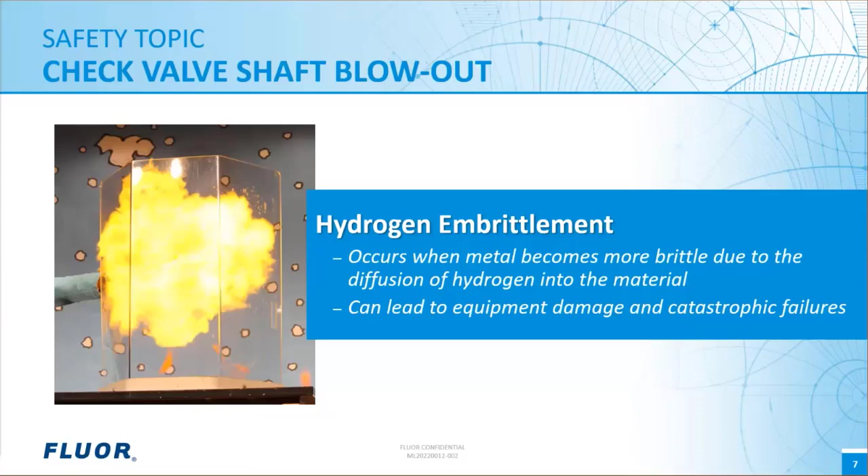Thank you, Brent. Our safety topic today, as it relates to our webinar, is on hydrogen embrittlement and an incident that occurred when a check valve shaft blew out. Hydrogen embrittlement is an important condition to consider when looking at hydrogen systems. It refers to the condition when metal becomes more brittle due to the diffusion of hydrogen into the material. And when materials become more brittle, there's a higher chance of cracking and leakage, and this can lead to equipment damage. As we know, hydrogen is highly combustible, so if leakages occur, explosions can occur and the failures can be catastrophic. And this is exactly what happened in 1997.

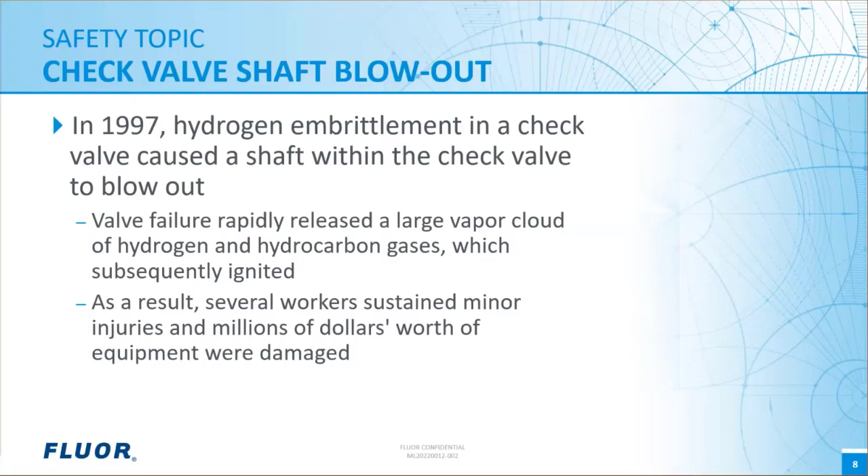There was an incident of hydrogen embrittlement in a check valve that caused the shaft within the valve to blow out. The valve failure released a large vapor cloud of hydrogen and hydrocarbon gases, which subsequently ignited. This resulted in several workers sustaining minor injuries, unfortunately, and millions of dollars worth of equipment were damaged. If we take a look at a cross-sectional view of this check valve, you can see in this red circle here, that was the location of failure, specifically in the dowel pins. The dowel pins are made out of hardened steel, which is more prone to embrittlement. They're also used to retain the shaft within the check valve. So when the pins failed, the shaft blew out. And this is what caused the leakage and explosion.

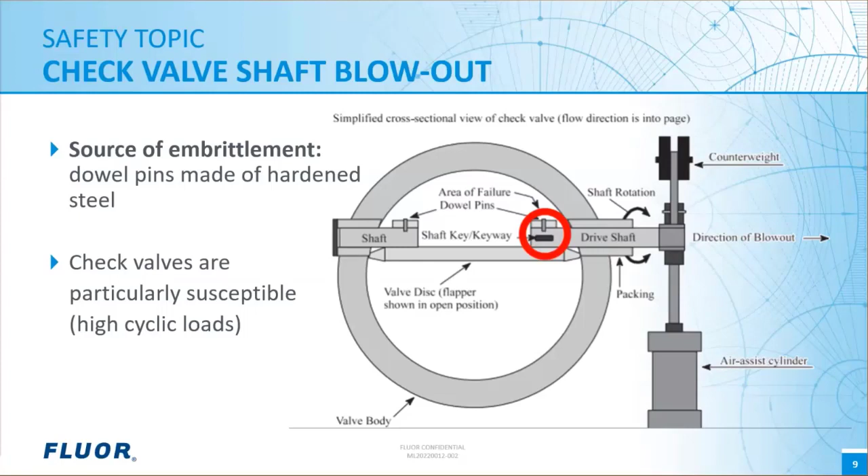It's also worthwhile to note that check valves and butterfly valves are particularly susceptible to this condition because of their geometry and because they typically undergo higher cyclic loads from having to open and close more frequently. So from this incident, there were a few lessons learned. For one, it's important to inspect hydrogen facilities to determine if there are valves that are at risk of hydrogen embrittlement. And if so, consider replacing or modifying the valves using a blowout-resistant design. If the valves are being modified, it's also important to consult the valve manufacturer to ensure that any potential modifications are safe. This incident was obtained from a document issued by the U.S. Department of Energy, and if you would like more information, the website is shown here.

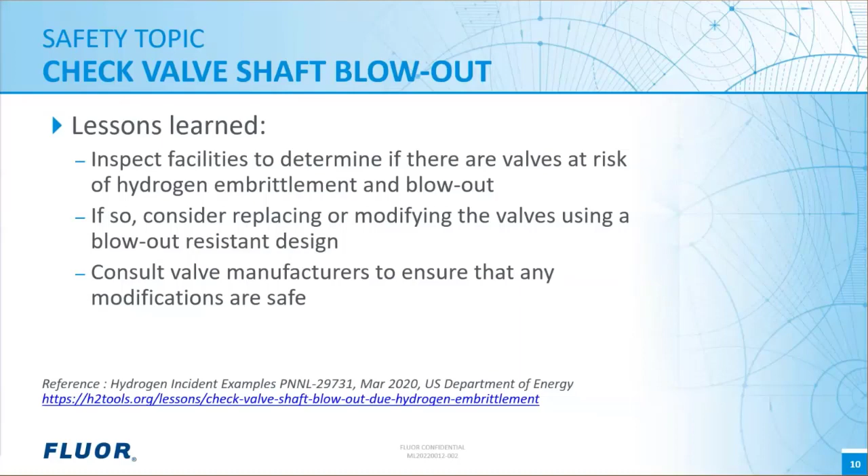Morning. We are going to talk about the various energy sources in the world, the potentials and challenges of using hydrogen as a clean energy carrier, and the design of infrastructure required in massive hydrogen storage and pipeline transportation.

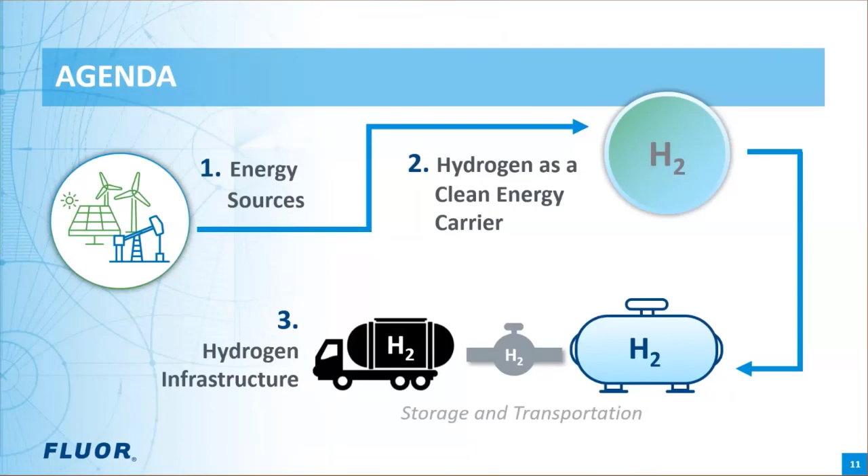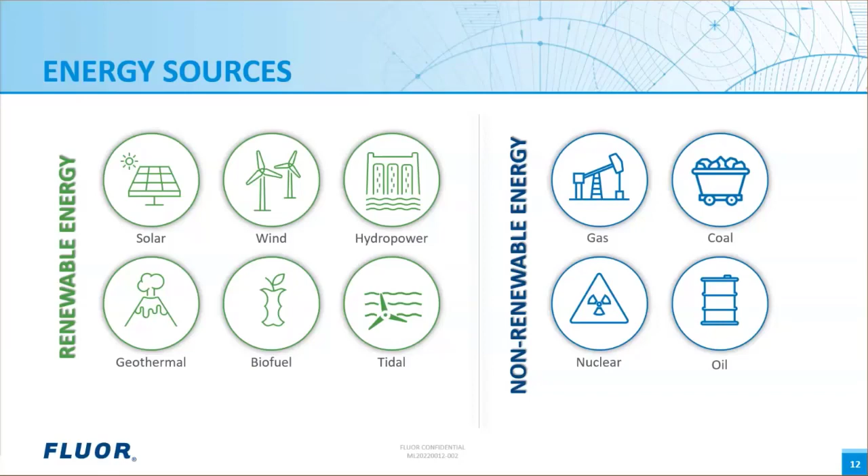On this slide, I wanted to show you the energy sources currently available to us in the world. We basically are using renewable and non-renewable energies. We are very familiar with non-renewables such as natural gas, oil, coal, and nuclear. We also have renewables such as biofuel, solar, wind, hydropower, geothermal, and tidal energy. Pretty much these are all the renewable energies that we know so far.

Two of the biggest challenges we are facing globally today are climate change and the continuous increase of energy demand. Based on the U.S. Energy Information Administration data, the U.S. consumed a total of 93 quadrillion BTU of energy in 2020, which is 7% lower than that of 2019 due to the impact of the COVID-19 pandemic.

However, the projection of U.S. and world energy consumption continues to grow dramatically in the foreseeable future. On the other hand, among all the total energy consumed in the US in 2020, about 79% was still from fossil fuel, and 34% was from natural gas. The consumption of fossil fuels was the major source of carbon emission and global warming.

Emissions must peak by 2025 to prevent disastrous climate change effects, according to the new UN climate report. The increasing energy demand and global warming control are now in conflict. It is therefore necessary to phase down the use of fossil fuel and increase the percentage of renewable energy consumption. Given this global consensus, also agreed by the US, we must think about how to make the best use of the existing massive fossil fuel system to transition to a clean energy system.

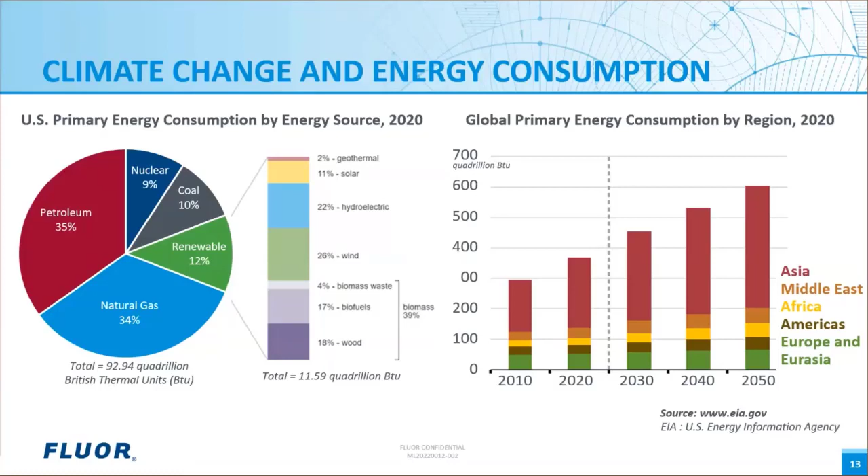The increasing energy demand cannot be met through increasing renewable energy production without resolving its major limitations. The major obstacle of using renewable energy is not only its high cost, but also the misalignment between its production and the consumer needs. Hydrogen for a long time has been looked at as a clean energy carrier that can help improve the alignment between renewable energy production and energy needs.

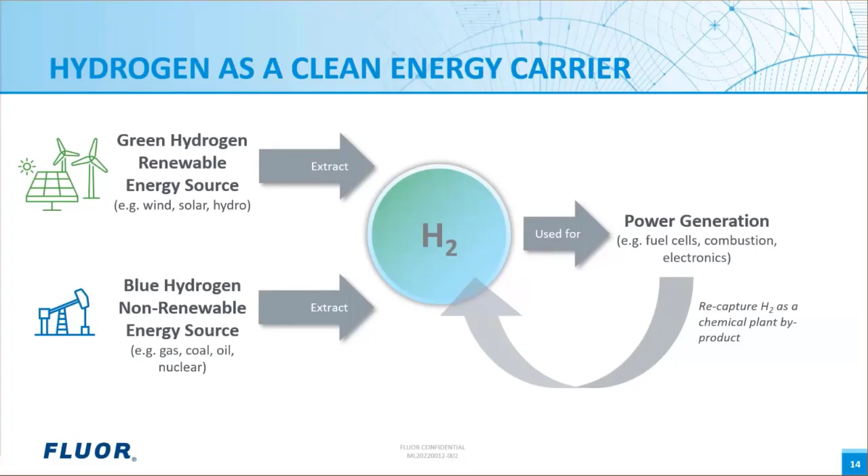Hydrogen can be produced from renewable energy as green hydrogen, and from non-renewable sources with carbon capture and sequestration as blue hydrogen. Hydrogen is also the byproduct of many chemical plants. The production, gathering, storage, and transportation of hydrogen will be an important part of the clean energy system to help control global warming. Need to emphasize that CO2 capture and sequestration...

It's possible to continue to make the best use of fossil fuels and infrastructure to make it clean by removing the CO2 content. Carbon capture and sequestration is part of the blue hydrogen production using non-renewable energy sources. That procedure is related to the hydrogen economy too.

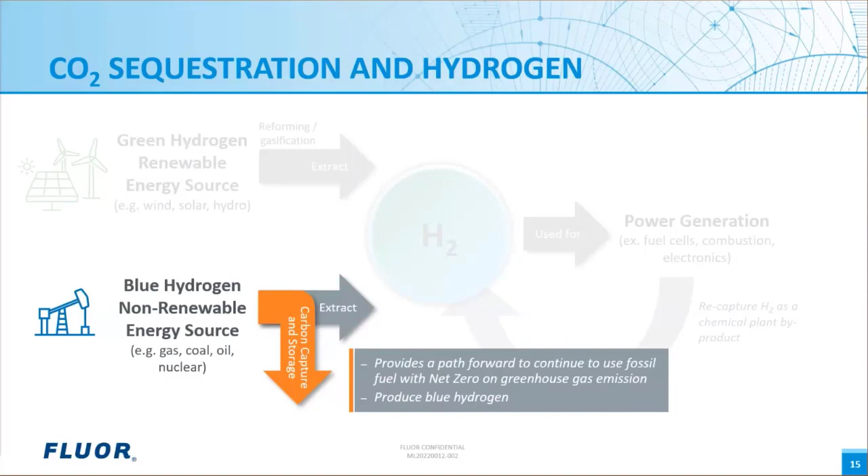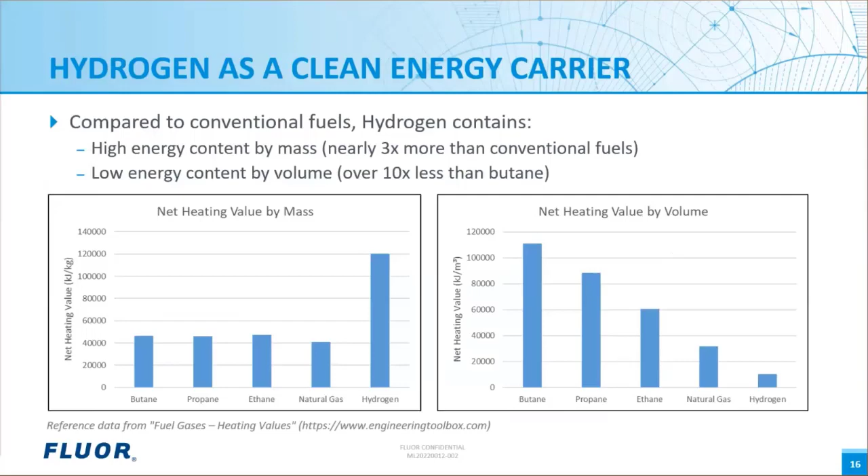Fuel cell power generation using hydrogen is very clean. It only produces water. However, the combustion of hydrogen in air as a fuel can lead to thermal formation of nitrogen oxides, another greenhouse gas. When released directly, hydrogen itself can interact with other gases and vapors in air to produce powerful warming effects. A new UK government study determined that hydrogen's global warming potential is about twice as bad as previously understood.

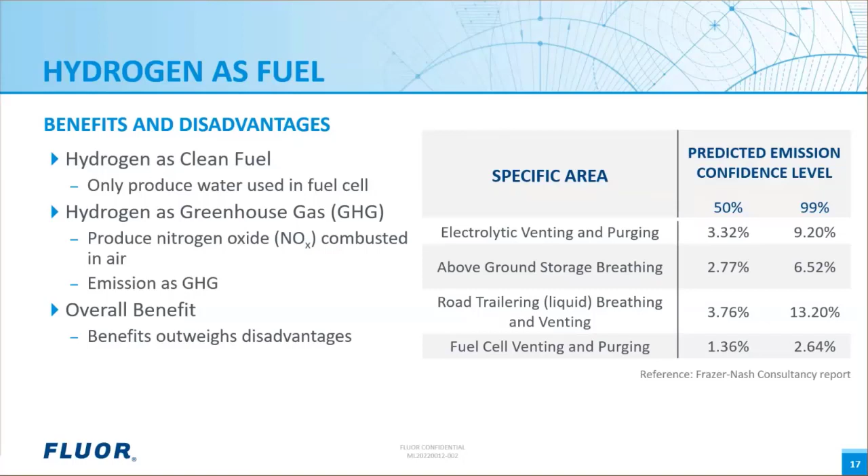The table on the right shows the estimated hydrogen emission. However, thanks to the very high energy mass content of hydrogen, even assuming the worst leakage scenario, it is still an enormous improvement in global warming by using hydrogen. The benefits outweigh the disadvantages in using hydrogen. The researchers did clearly demonstrate the importance of controlling hydrogen leakage within a hydrogen economy.

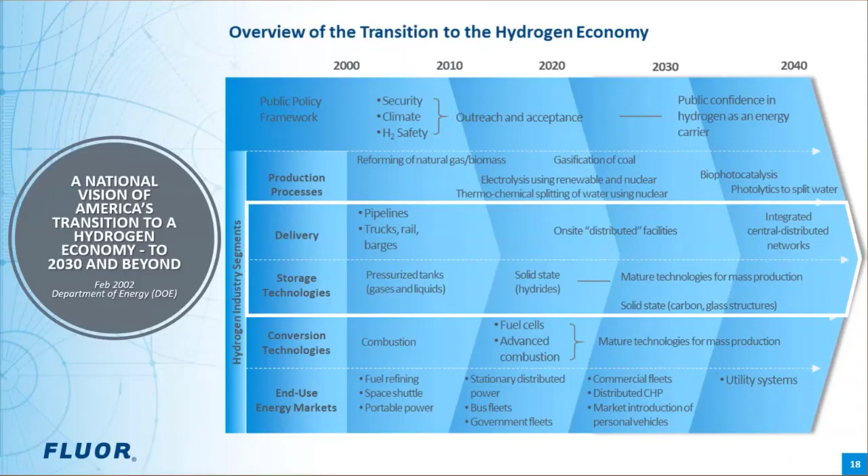Because of the promising benefits, the U.S. Department of Energy produced a national vision of America's transition to a hydrogen economy. This chart shows a roadmap. Our focus today is about the storage and delivery of hydrogen. As you can see in the middle, the roadmap related to the storage and transportation of hydrogen in the future is an integrated central distributed network targeted for the year 2040.

The hydrogen will be collected through the gathering system into hubs. From there, hydrogen will be compressed as gas and transported in major trunk lines, interstate or intrastate pipelines, and stored in massive storage facilities. Hydrogen will be delivered to end users from storage facilities through distribution pipeline networks.

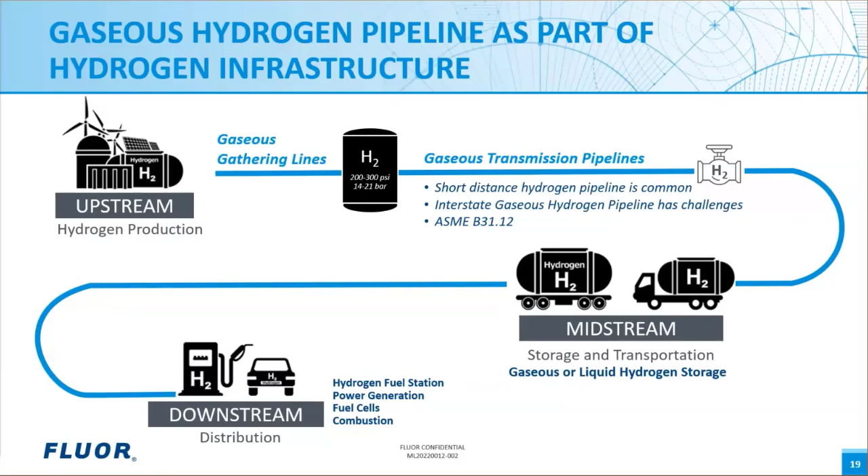In recent years, there's also motivation to use ammonia as a carrier and chemical storage media for hydrogen. Ammonia is liquid in normal conditions. The molecule is bigger with much lower leakage potential in metal pipes. It has lower volume and higher mass of hydrogen contents if transported in pipeline. However, there are higher nitrogen oxide emission risks associated with the production and application of ammonia comparing to pure hydrogen.

Ammonia is ideally suited to be made from green sources and can be efficiently shipped in massive volume globally through the marine system. Once imported, ammonia can be decomposed back to hydrogen into the onshore integrated hydrogen network.

However, ammonia is highly corrosive, requiring it to be contained and shipped in very dry conditions. Ammonia is not an ideal medium for long-distance pipeline transport. The maintenance cost is very high compared to other pipelines. Magellan Midstream decommissioned its 1,100-mile Texas to Upper Midwest ammonia pipeline in 2019 due to its unforeseeable high operation and maintenance cost. Today's discussion focuses on the onshore pipeline transport systems, and anhydrous ammonia pipeline will not be our focus,

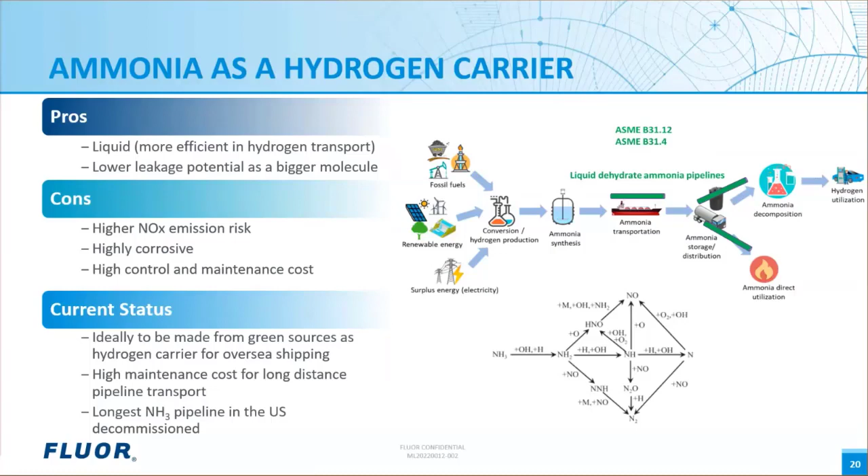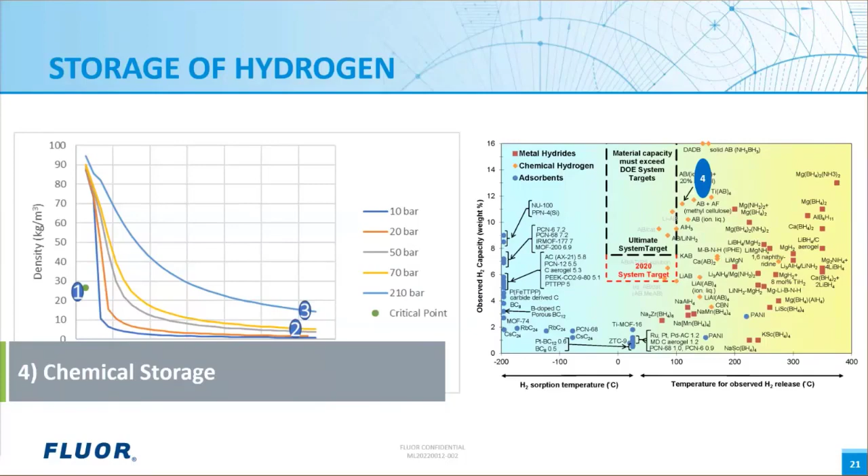To build an integrated central distribution network at the national level, the utilization of pipelines and underground storage facilities are necessary. Pipeline enables massive transportation of hydrogen as gas or supercritical flow. Pipeline is safe and very economical. Cost of pipeline transportation can be reduced through optimization in design and operation.

We will demonstrate the J-curve analysis in later slides to demonstrate the minimization of total cost per throughput of transport in pipeline design. The minimization of the transportation cost helps to lower the overall cost of using hydrogen as a clean fuel.

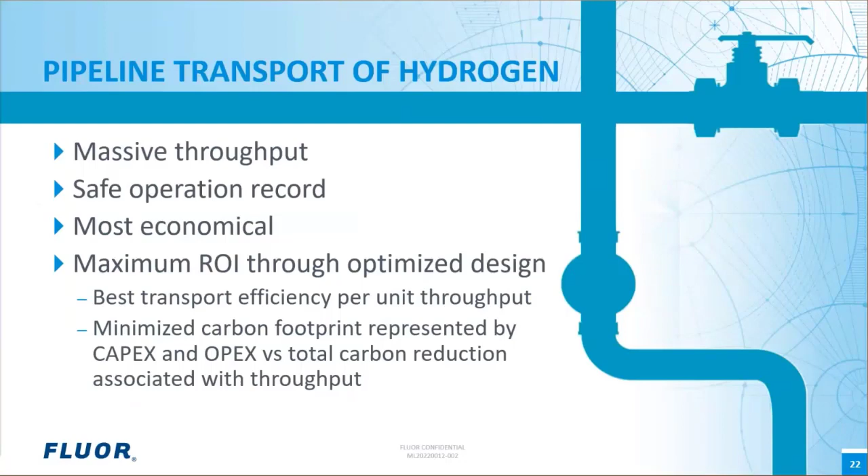Based on the framework of the integrated central distributed hydrogen network, we listed the conditions for hydrogen transport and storage most likely in the future. The transmission pipeline will operate at around 55 to 85 bars, which is ASME 600-pound class system.

Geological storage will be at 100 to 670 bar, which is above ASME 2500-pound class rating, for components near the bottom of the underground storage. The surface area will be lower class rating.

We will also need large flow rate centrifugal compressors capable of producing 85 bar discharge pressure for transmission pipelines, and reciprocating compressors capable of producing 330 bar discharge pressure for underground storage injection. The terminals and distribution networks of hydrogen will be at 52 to 83 bars. It's also ASME 600-pound rating.

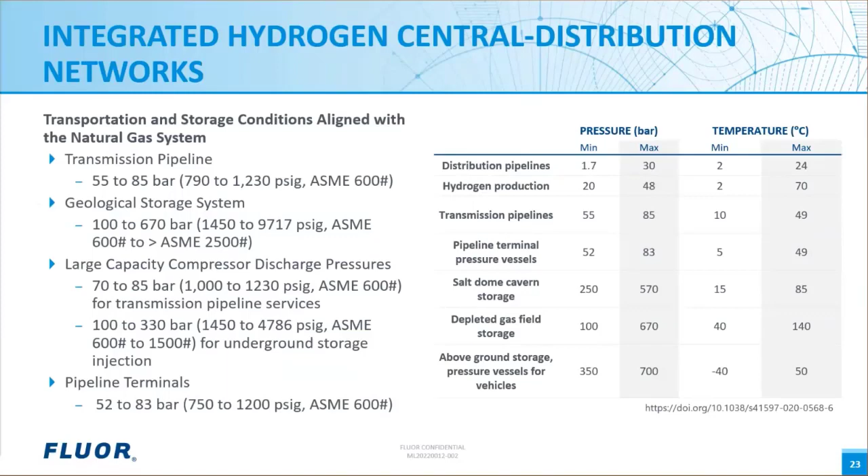Geological storage provides a massive capacity for the future. Those storages include underground salt dome caverns, depleted gas reservoirs, aquifers, and hard rock caverns. The later slides will show the latest reported data about the existing underground gas storage facilities in the U.S.

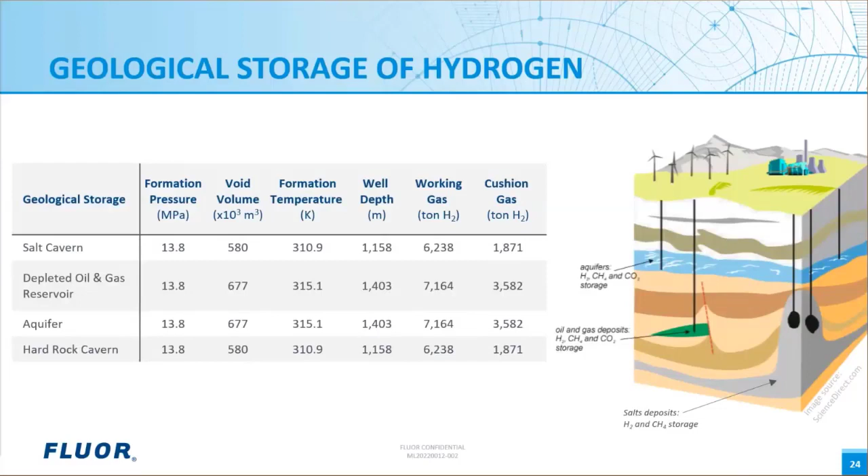The U.S. currently has a total of 453 underground gas storage sites. Salt dome caverns are a promising hydrogen storage solution. They can provide a huge capacity in the 100 gigawatt-hour range.

Generally, rock salt has a very low hydrogen permeability, which ensures minimal loss of hydrogen or contamination with the geological surroundings. Potentially, salt dome caverns can store hydrogen at pressure more than 100 bar, with fast storing and releasing rates. Examples of existing hydrogen salt dome cavern storage are shown here in the table.

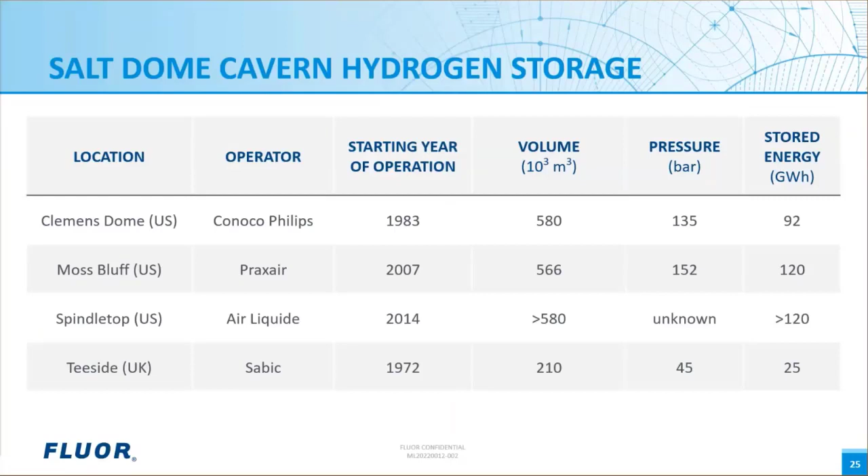There are currently three types of concepts on long-distance transmission pipelines for hydrogen. The first one is blending of hydrogen in existing natural gas pipeline network. Second is construction of pipelines for pure gas hydrogen. The third one is liquid ammonia pipeline. We mentioned the high maintenance cost of ammonia pipelines, so the anhydrous ammonia pipeline is not discussed today.

Pipeline transmission of hydrogen is not something new. It dates to the late 1930s. It has a very good safety record. Normally, hydrogen pipelines operate under 69 bar G.

The U.S. currently has 2,538 kilometers of pure hydrogen transmission pipelines in operation. In Europe, it's about 1,770 kilometers. The current long-distance hydrogen pipelines in operation in the U.S. are mostly along the Gulf Coast. They transport hydrogen to well-established long-term chemical and manufacturing users.

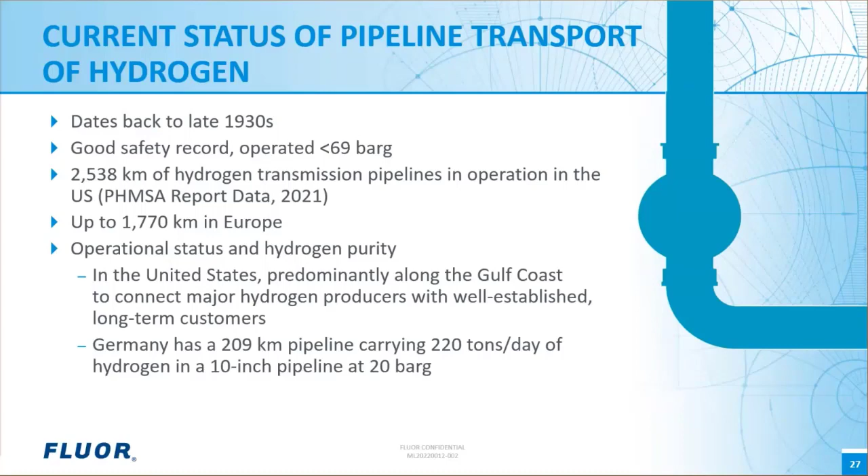Germany has about 209 kilometers of pipeline carrying 220 tons per day of hydrogen in a 10-inch pipeline with very low operating pressure of 20 bar.

The U.S. natural gas pipeline system has evolved from local networks serving municipalities in the mid-1800s to a vast network of interconnected pipeline systems with 3.9 million kilometers of pipe, more than 400 underground storage facilities, and more than 1,400 compressor stations. Natural gas accounted for 34% of U.S. energy consumption in the year 2020.

Moreover, recent increase in U.S. gas production rates suggests that the existing natural gas system will continue to provide relatively clean energy for some time, especially with increased adoption of energy efficiency measures. Given these characteristics, hydrogen blending could become a widespread, long-term, and integral practice to supplement critical U.S. energy infrastructure.

Actually, the U.S. Department of Energy has been working on this for years through the HyBlend project. INGAA, the Interstate Natural Gas Association of America, also released their RFP for developing a guideline on blending hydrogen in existing natural gas systems.

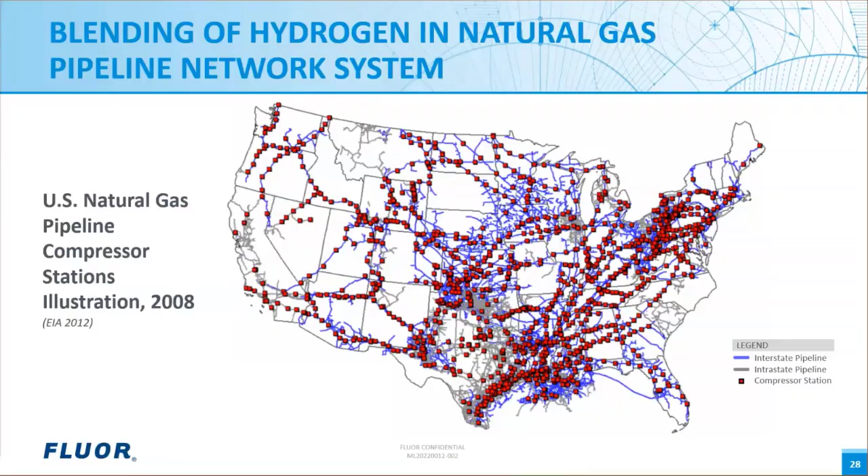Europe could devote, based on the news, 40,000 kilometers of natural gas pipelines to hydrogen by 2040. The blending of hydrogen in existing natural gas systems provides an economic opportunity in gradually transitioning to the hydrogen economy. With modification and changes, the existing gas system can also be upgraded to handle pure hydrogen.

The upgrade of the existing system can be the most cost-effective way with minimum waste and environmental impact compared to new construction of pipelines and storage for pure hydrogen. It has been proven by pilot studies that the system requires little or no change for hydrogen concentration less than or equal to 20%. The cons are it requires downstream hydrogen extraction and recovery at regulation stations for hydrogen end users. Economic trade-off evaluations are necessary to obtain a cost benefit.

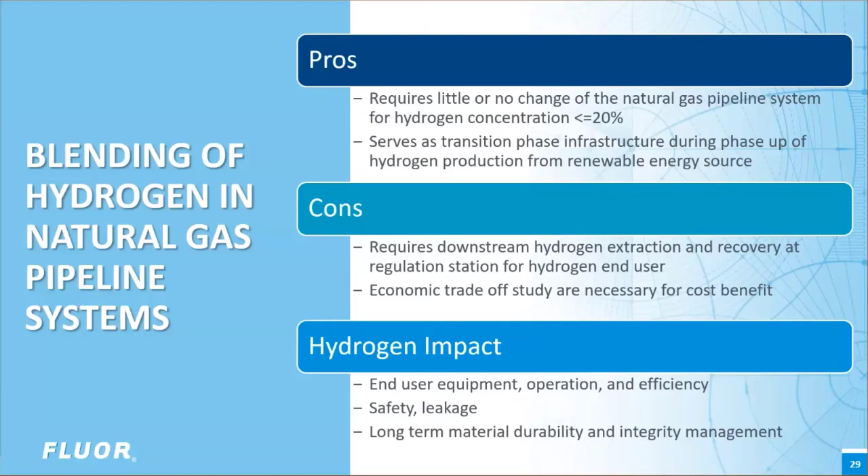Blending of hydrogen in the system also has impact on end user equipment and operation efficiency. Whether the safety and high leakage potential of hydrogen have major impacts on end users also needs to be understood. Long-term durability and integrity management need to be studied and procedures need to be developed. Existing natural gas systems need to be upgraded to be able to transport pure hydrogen or blend with hydrogen higher than 20%. There are technical challenges to that.

However, the natural gas energy content is associated with CO2. The expense of hydrogen blending in natural gas pipelines will also include carbon capture and sequestration and hydrogen recovery. In general, a pure hydrogen system will be not only clean, but also economical.

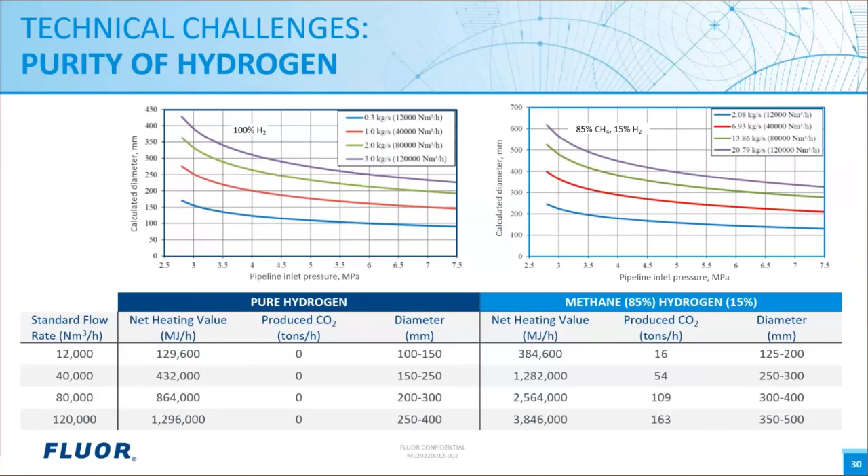The next major challenge is material selection. There are steel pipes and non-metallic pipes available for hydrogen application. The Pipeline and Hazardous Materials Safety Administration data shows that up to 2021, the U.S. has a total of 2,538 kilometers of hydrogen transmission pipelines, compared to a total of 485,000 kilometers of all gas transmission pipelines.

The data shows that the transmission hydrogen pipelines in operation are predominantly carbon steel pipes. All steel pipes in hydrogen transmission are not coated. Environmental hydrogen embrittlement is an issue in hydrogen services. Metal working in a hydrogen environment over a long time will cause deterioration of the material.

There is, however, no hydrogen embrittlement at low pressure less than 70 bar. This is good news. Hydrogen transmission pipelines are generally operated at pressure from 20 to 70 bars. The expected service life can reach 15 to 30 years.

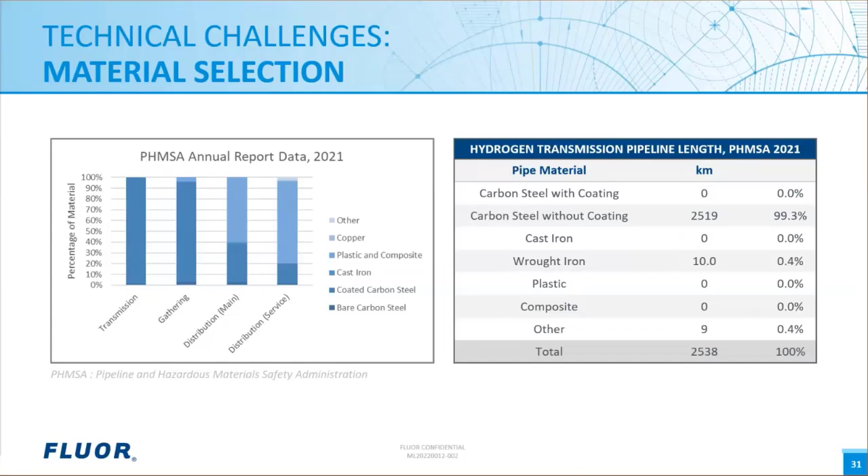Use of non-metallic material was never recorded in the gathering, transmission, and distribution of hydrogen in operation according to the PHMSA annual data. Some researchers show that reinforced thermoplastic pipes are ready to be used for hydrogen up to 42 bar, and HDPE pipes are hydrogen ready up to 15 bar. However, the design pressure of plastic pipes needs to be increased to at least 70 bar for hydrogen transmission, and long-distance testing is quite necessary.

The material required for underground geological storage is much more a challenge. Underground storage operates in a higher pressure range, which can cause hydrogen embrittlement. There is still research ongoing. We need to gather all the information and hopefully develop a guideline for material selection in this area.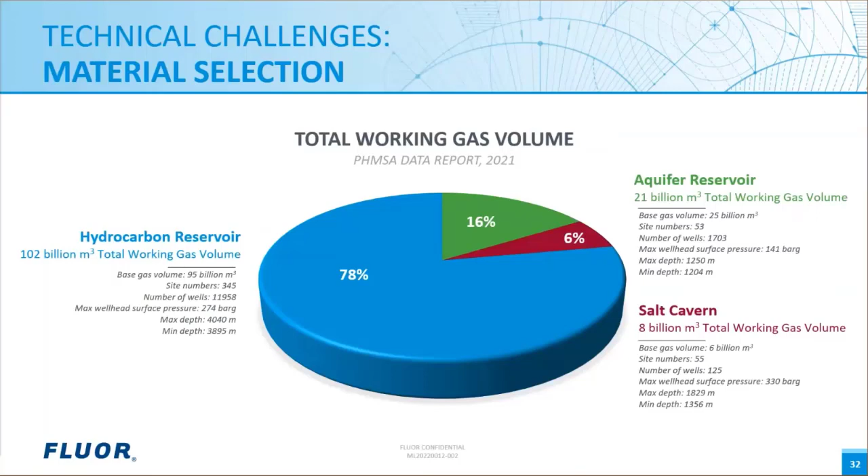The injection and withdrawal of pure hydrogen or gas with hydrogen blending dramatically influence the thermodynamics, mixture composition, and the contamination and containment in the storage inventory. The salt dome cavern thermodynamics need to be studied to examine the potential change of temperature, pressure, and thermal stability in the cavern. Rock salt has a very low hydrogen permeability, which ensures minimal loss of hydrogen or contamination with the geological surroundings. Gas withdrawal from salt dome cavern requires dehydration in early operation years.

The dehydration requirement quickly decreases after a few years of operation. The gas from the cavern becomes dry. Generally, salt contamination from the cavern storage is very low. However, some researchers show concern when very high purity of hydrogen is required. In that case, gas or hydrogen withdrawal from salt dome caverns needs desalination and dehydration. The current surface dehydration and filtering equipment used for natural gas need to be evaluated on treating very pure hydrogen.

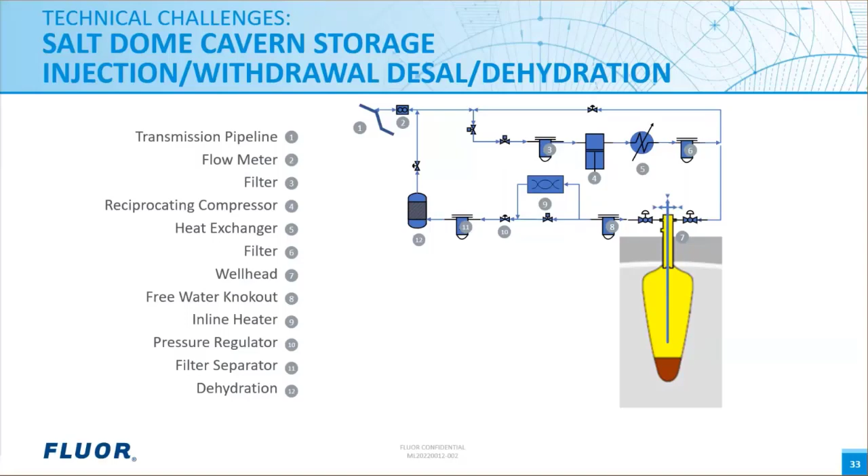Another major technical challenge is the compressor selection. We know that hydrogen volume is 3 times that of natural gas at the same pressure. Hydrogen is very difficult to compress. It has a very small molecule which has high potential for leakage through containment. The compression of hydrogen requires much more power, higher tightness, and special seals to reach the pressure required for high volume transmission. We know from compressor manufacturers that multi-stage reciprocating compressors are ready for producing discharge pressure up to 69 bar for hydrogen. This is considered the most state-of-the-art equipment for compressing hydrogen.

The maintenance cost of wearing parts creates a technical challenge in pure hydrogen service. A centrifugal compressor capable of providing large volumetric flow rates and discharge pressure more than 83 bar for transmission pipelines is yet to be developed. Another issue is the contamination of hydrogen through compression.

The DOE and INGAA are supporting the compressor design studies on hydrogen pipeline and underground cavern injection requirements. Hopefully, oil-free compressors that have a working pressure ranging up to 80 to 100 bar can be produced in the near future. Ideally, the compressor will be efficient, will not contaminate the hydrogen, and will be also reliable and durable.

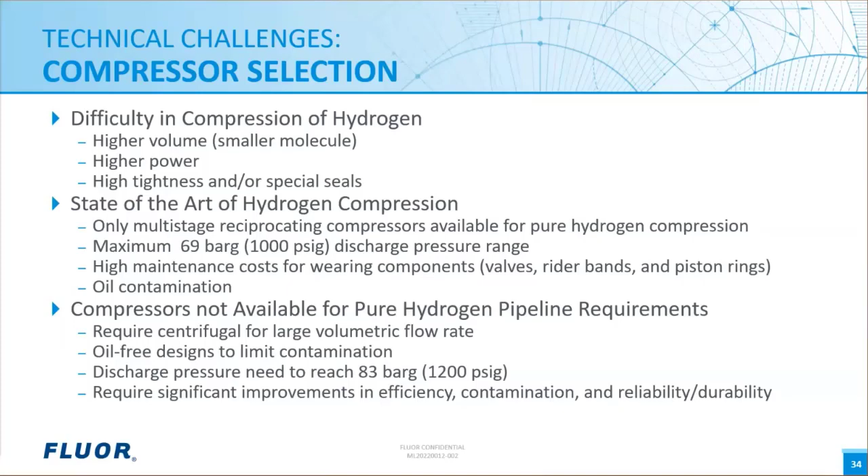There are other challenges, for example, in operation and integrity maintenance, and validated safety management measures for pure hydrogen pipeline. DOE, INGAA, and the PRCI are leading the development of industry standards in this area.

Based on the information we've just introduced, we can talk about the pipeline design and methodology for hydrogen. We think the most important thing is to have in-depth knowledge of both existing natural gas systems and hydrogen pipeline systems. The design will focus on material and equipment availability, cost, and safety. It also needs to consider uncertainty, including the purity of hydrogen in the system.

It's worth mentioning that artificial intelligence may provide a cost-effective way in hydrogen pipeline routing. For hydrogen pipelines, dispersion and rupture impacts will be different. This can be considered efficiently using artificial intelligence tools.

The design also needs to be based on solid construction data. Advanced tools in figuring out the cost basis on construction, based on construction experience, are quite necessary. The pipeline also needs to be economically optimized to be able to demonstrate the cost saving and carbon footprint reduction. It's necessary to compare the general cost of a pure hydrogen system versus a natural gas system with carbon capture and sequestration.

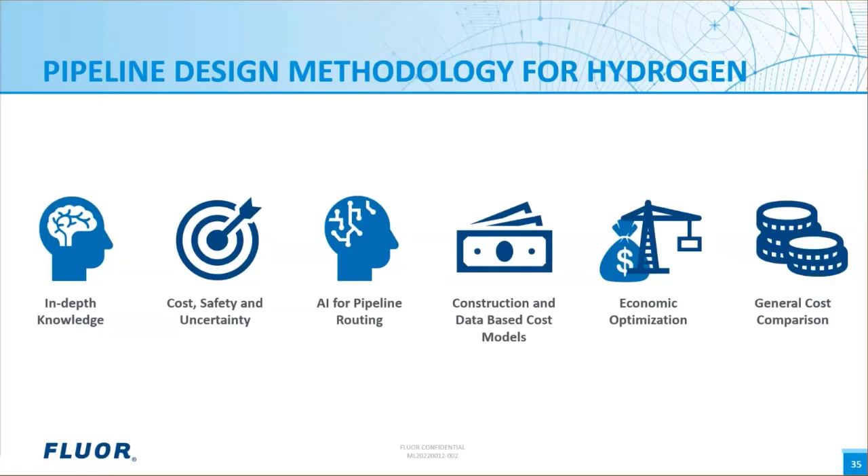Fluor's technical capabilities are very well suited in hydrogen pipeline and storage design. Our capabilities are guided by in-depth knowledge and history data. We understand the thermodynamics and flow assurance principles necessary for design, and have a strong history of understanding client's operational and capacity needs. Our philosophy enables us to provide flexibility with maximized return of investment and minimized transportation costs.

We have in-depth understanding and consideration of the safety of supercritical and gaseous hydrogen pipeline design. We mention supercritical flow particularly because although we call hydrogen pipeline a gas pipeline, based on the operating conditions of transmission systems, hydrogen is actually in most operating conditions a supercritical fluid.

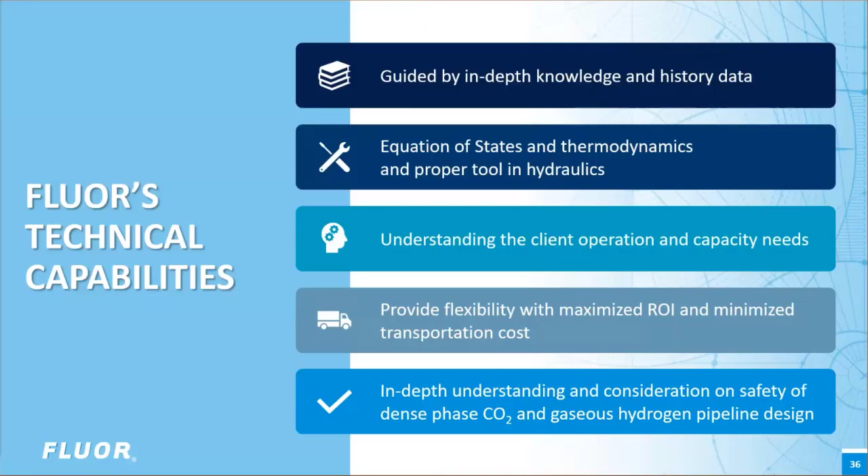This chart shows the typical pipeline system design optimization procedure we follow. We start with initial design based on history data, falling within the normal operating range of existing systems. We then work with the client to determine the required flow capacity, the stages of operation and construction, and the flexibility in the future for expansion or downsizing.

Different pipeline routes are then selected for economical and technical comparison. For each candidate route, there is a J-curve analysis for maximization of cost saving in pipeline design. Throughout the J-curve analysis, the optimized design is developed for every candidate pipeline route. The cost and savings for each route are then screened based on the J-curve analysis results. This procedure produces the minimum total transportation cost per throughput of the pipeline.

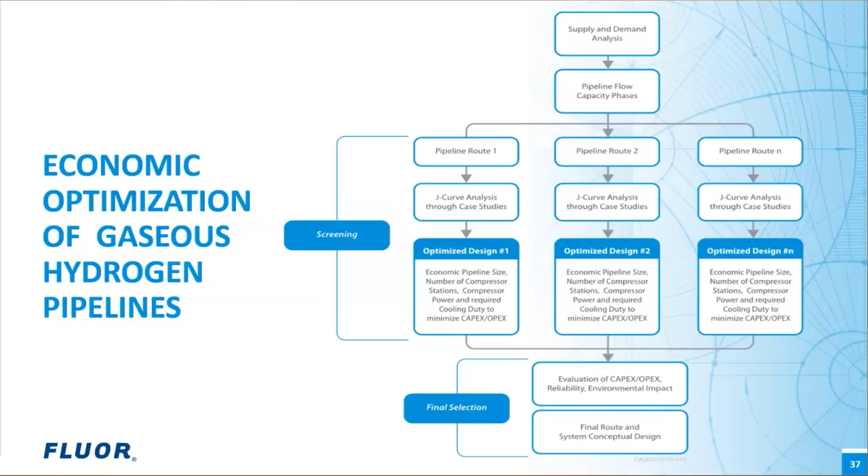The J-curve analysis is a widely used economical optimization method accepted in the gas industry. It considers the ballpark cost of the pipeline through scaling with capital expenditure, operation expenditure, and financial cost basis.

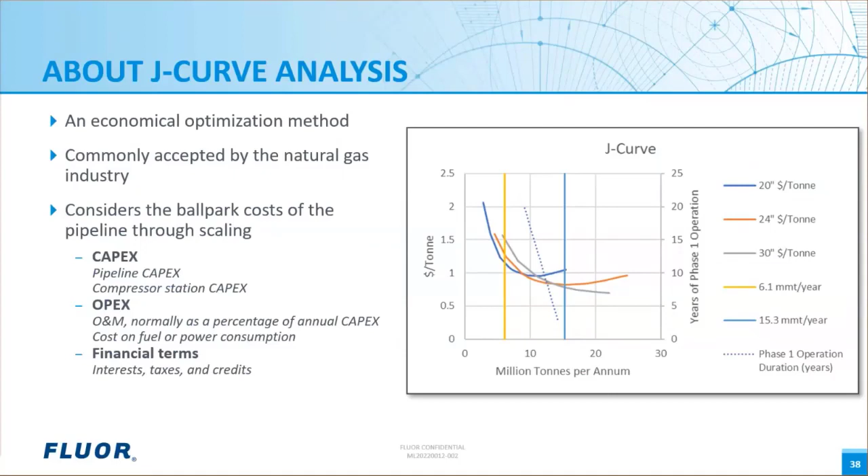The J-curve analysis starts with building a scalable basis for ballpark cost estimate. Based on the pipeline constructability analysis, a cost base for capex per unit size and length of pipeline, and unit power installed in compressor stations, are developed. The OPEX includes the cost basis for power or fuel and operation maintenance cost as a percentage to annualize the capital cost. The next step is to define the operating range, basically the throughput over the life cycle of the system.

Then a pool of candidate pipeline sizes, based on the history range of pipeline flow capacity, are defined. The hydraulics model is used to calculate the compression power, power loss, and pressure loss of the system, to provide data for the calculation of capex and OPEX of the pipeline. The transportation cost per unit throughput is calculated as the capital cost, operation cost, plus financial cost per unit throughput of hydrogen. This transportation cost is calculated for a range of throughputs.

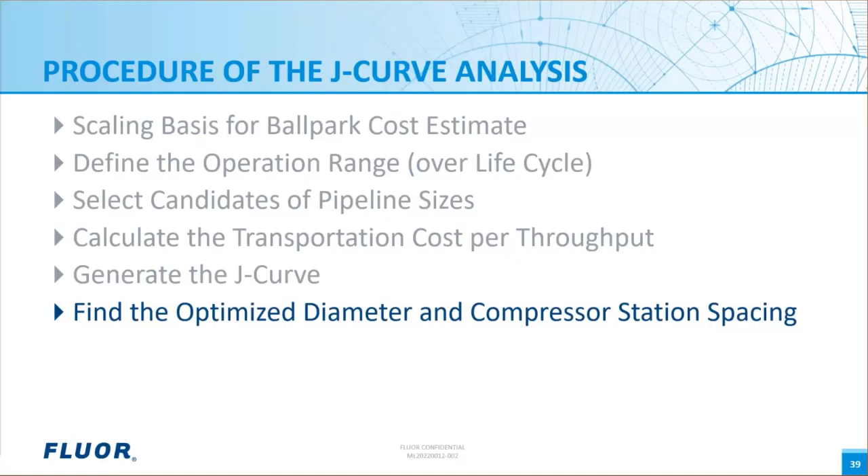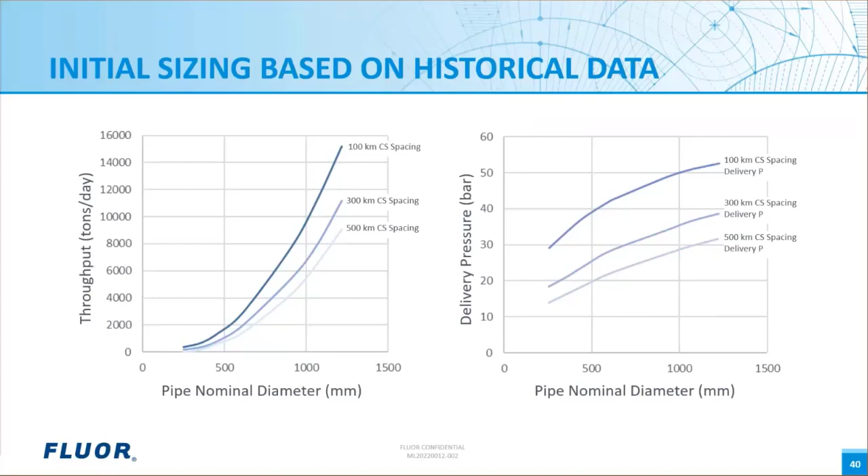One is that transportation of hydrogen only makes economic sense with larger size pipelines capable of delivering thousands of tons of hydrogen per day. The second is that decreasing the pipe length by adding more compressor stations helps increase pipeline flow capacity for smaller pipes. The extra capital and operation cost of compression is worth the investment to increase overall capacity and lower the cost of hydrogen transportation in smaller size pipes. However, with larger size pipe, more compressor stations do not add any benefit in terms of reducing the levelized or transportation cost of hydrogen.

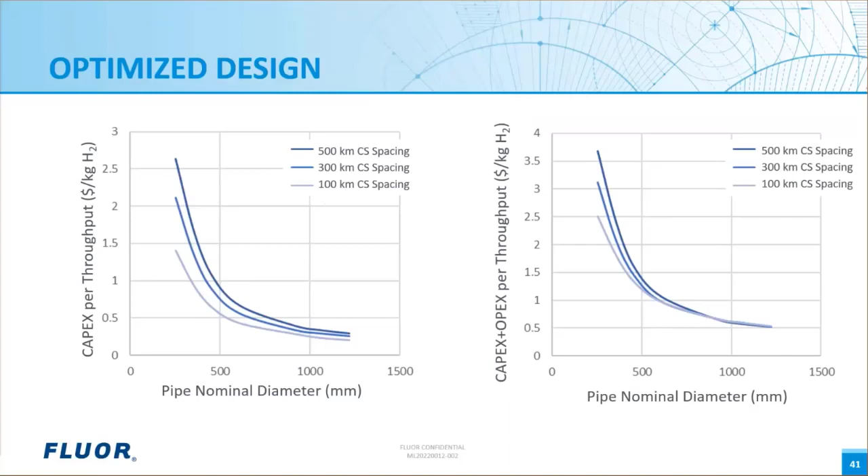In summary, today we talked about the necessity of phasing down fossil fuel consumption to peak carbon emissions and prevent disastrous climate change effects. We talked about the potentials and challenges of using hydrogen as a clean energy carrier. We also introduced the massive natural gas infrastructure in the US and the potential to blend hydrogen into the gas system and upgrade the whole system for the hydrogen economy. Finally, we discussed the working conditions and optimized design of hydrogen storage and pipeline systems.

That concludes my presentation for today, so I will turn it back to Brent for questions and answers.